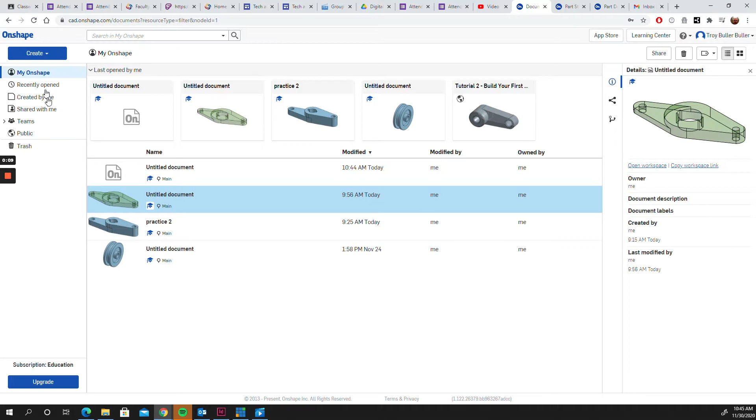Okay, we're in Onshape here, and I want you to go ahead and create a document. You just click Create Document. I've already got one started, so I'm going to open it up.

What I want you to do is go sketch on the top plane. I want you to sketch this.

So all I used was circles and rectangles. Let me get in that sketch. I want to add one thing to it. So I just use circles and rectangles, and then go ahead and pause the video here and get that sketched out.

It doesn't have to be the exact same dimensions as mine. Just get something very similar sketched out, and then we'll come back and extrude this.

Extrusion is where you make something 3D. So that's what we're going to be doing today.

Okay, I'm going to go ahead and extrude this. So you need to make sure you don't have any tool highlighted. So like here I'm on circle, right? How you get out of that tool, if it's turned blue, you just click on it so none of these are blue.

Okay, we're going to extrude this circle first.

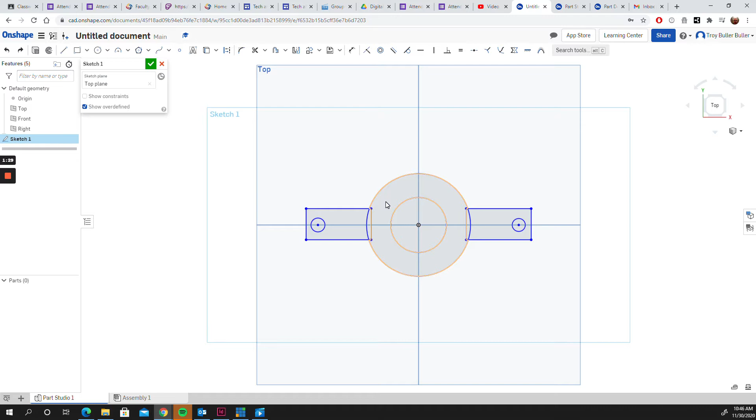Anything you don't select that's inside of it is going to extrude as a whole. So I'm going to select this face. Now notice I didn't get these outside, so when you have overlapping stuff and you want it, you have to go select it as well.

So you just kind of keep clicking. May have to zoom in here. Keep clicking until you get everything.

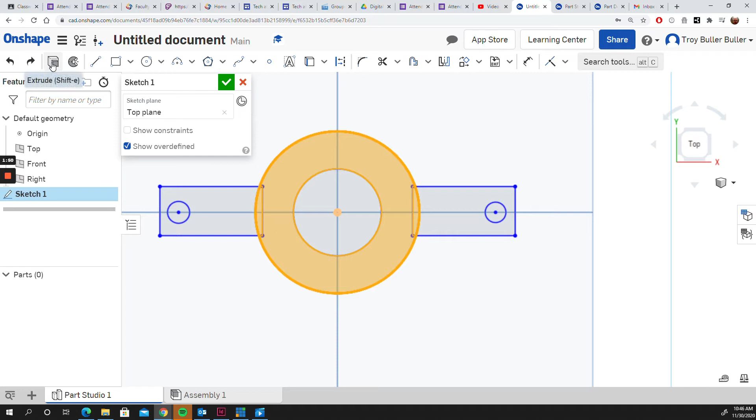And then we're going to click this button, and it's going to bring up our extrusion menu. I'm going to scroll to the side here. A couple things - there's different types of extrusions you can do. We're going to use blind right now, but we'll talk about some of these others later on.

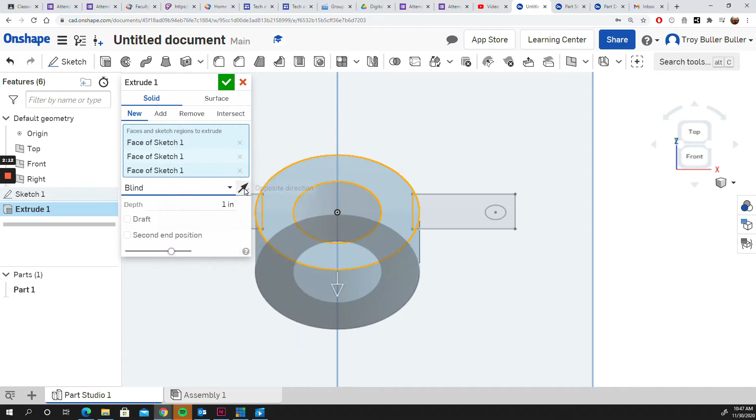You can also flip it. So if you want it going downwards rather than upwards, you can click that arrow and it'll go up or down. And then kind of the last thing is you can set your depth.

So I want this to be 3/4 of an inch. So I'm going to hit OK.

And so that'll set your depth, but you can also, if you're just wanting to eyeball something, pull it with this arrow right here. So I'm going to go back and set it at 3/4 of an inch.

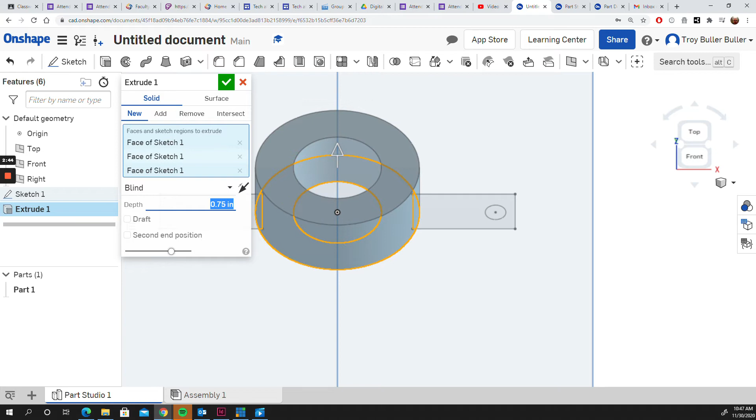Okay, so once I kind of get that extruded where I want it, I'm going to click that. Now notice my other pieces disappeared. That's okay because we're going to extrude those too.

We're just going to click on Sketch again and go up to the top, and I want this one and this one both to extrude. So I'm going to extrude those, and we'll do those to, say, 0.33 inches.

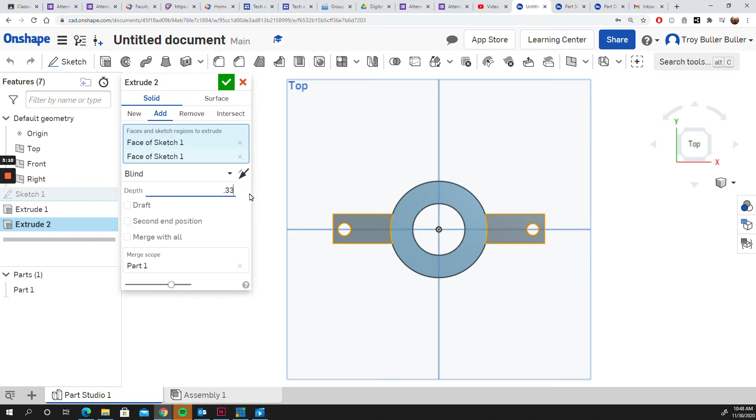And let me rotate this around so you can see what's going on here. Okay, so we have a piece now. And notice I got a part in my parts inventory. So we're going to talk about that.

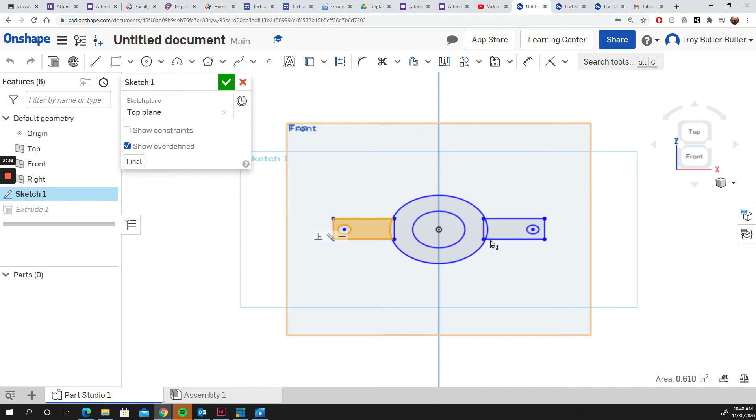The other thing, some of you had questions. Oh, I just accidentally deleted that. Get these to extrude. And this time I'll click the check mark.

Okay, I don't know what this is. We're going to rename this part because later on we're going to have parts inventories where we can assemble stuff into working models.

So I'll just call this Acme. I don't care, it can be anything. So you do that by right-clicking and you rename.

Now I want to go ahead and assign a material because I'm going to teach you about the mass.

So I'm going to assign a material. Click here, and we'll click Onshape. I'm sorry, we're going to click there, and there'll be a whole bunch of stuff in here. If you need to search something, you can just type it. So I want 300 stainless steel, and I'll go ahead and click the check mark on that.

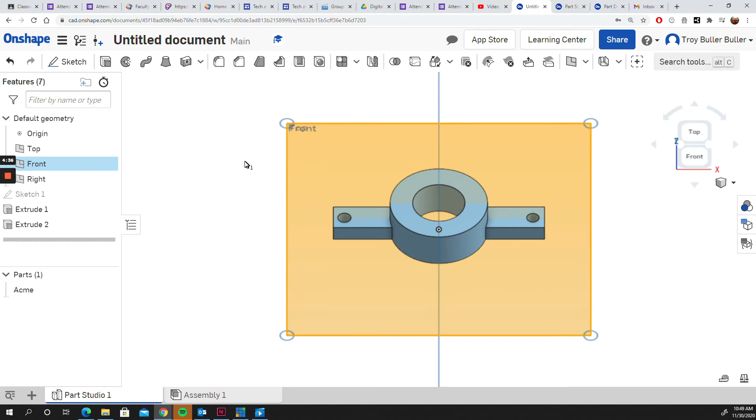So I assigned it a material. Oh, I didn't have it selected. Let me get everything selected. Oh, I missed part of it. Okay, everything's selected. Now I'll right click on it, assign material, and oh, it's 300 stainless steel.

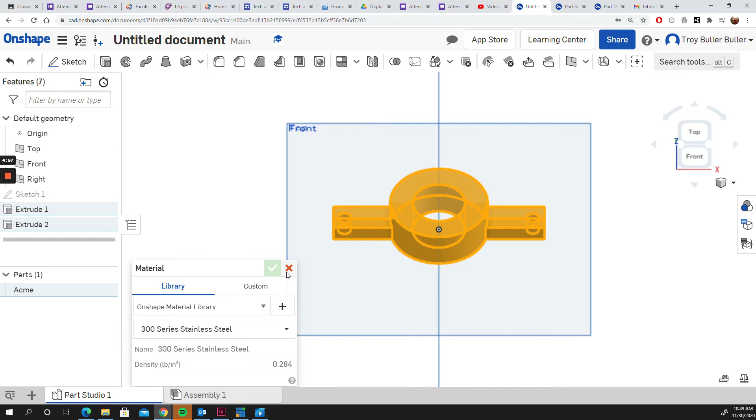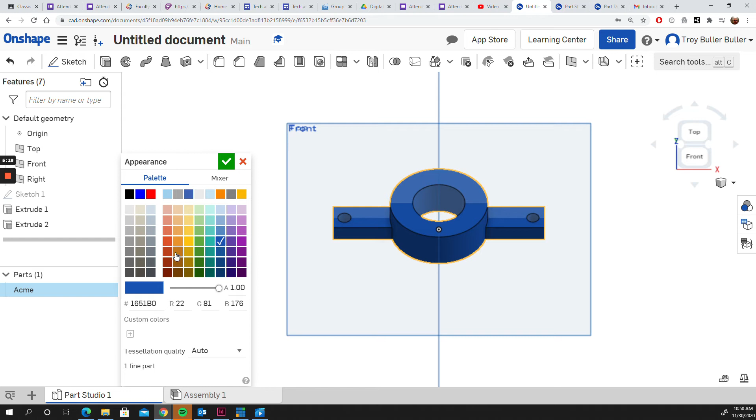We'll just make sure though. Okay, you can also change the appearance of it. So you can right click on it and edit appearances, and you can pick colors. You can also right here change the transparency, so if you have something that has glass in it, you can change it to where it's a little bit see-through. Those are some of the properties. You can also go to Mixer and create a color, and that should show up in your palettes after that once you use that. So we'll click check mark.

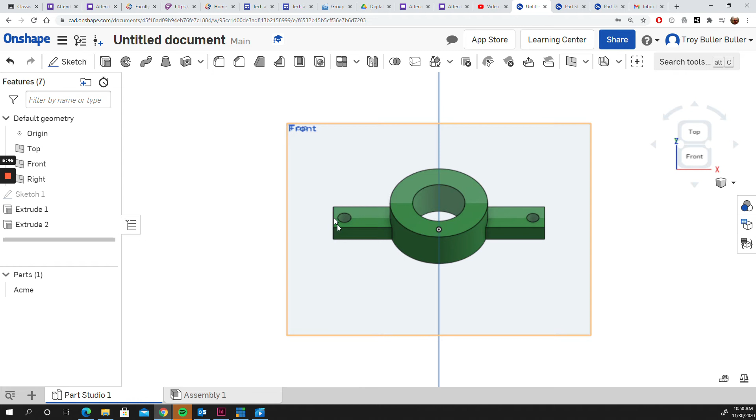Okay, so I've got my part here. How do I find out what the mass is? I can just go over here and display properties. I've got to have it selected, so I'm going to pull out a selection box. And you can tell here that I have a mass of 0.558 pounds, volume of 1.6966 inches cubed, and what the surface area is. So this will give you all those things. I'm going to go ahead and shut that down.

I know some of you had problems with getting into other units, so I want to show you how to do that. Whoop, bumped off my tab. There we go. So what you'll do is you'll go right here and workspace units, and you can change this to feet, inches, centimeters, millimeters, whatever you're working in.

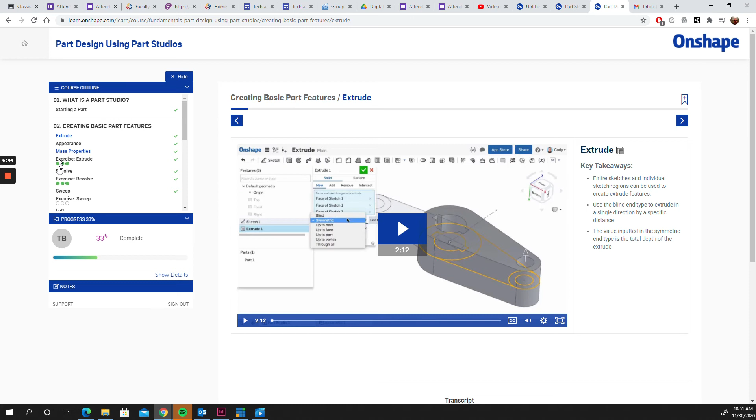So after you've watched this video, what I want you to do is click the link I have in Google Classroom, and you're going to come down here to exercise extrude, and you'll click the over arrow, and notice there's a whole bunch of things here. You're going to set those parts up in size, and if you ever need to change the size of a part, it's not a big deal.

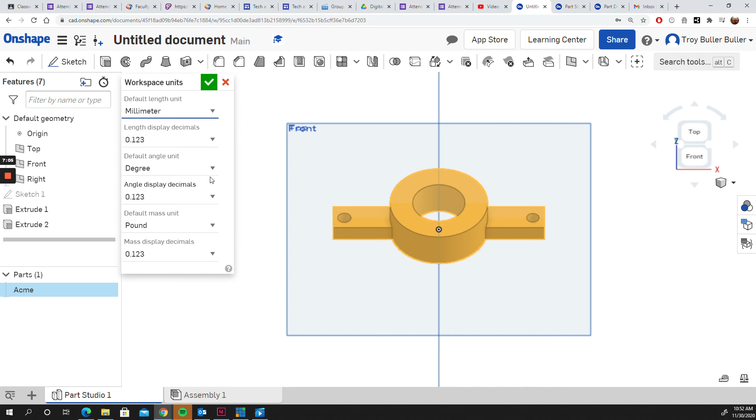I just sketch it out and then start changing the sizes. Let's go to my sketch, and let's click on that, and click the measurement thing. Oh, that's not what I wanted. Just a second. I always forget where the measurements are. There we go. Oh, I'm struggling here. Just a second.

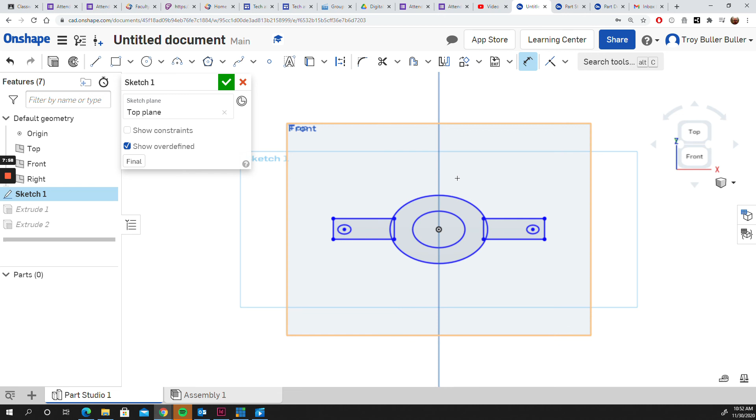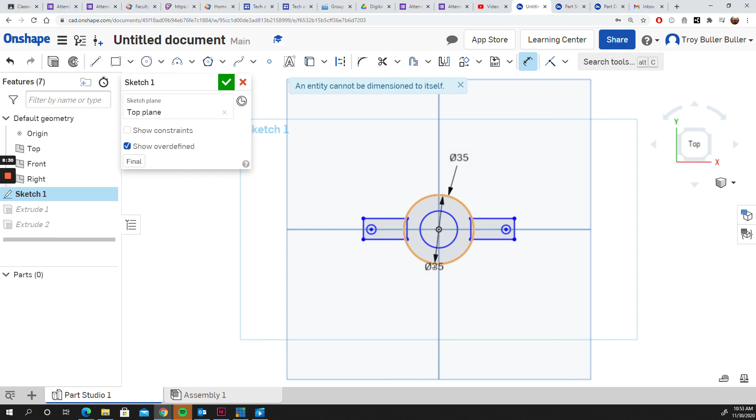Okay, you can retype that. So if I wanted it 50 instead of 48, you could type that. Let's do something quite a bit smaller, let's do maybe 35. You will want to do those things before you extrude, but you can see here now I got a measurement of 35 on the diameter. It did shrink everything else. If you do this before you extrude, it shouldn't shrink everything else. I would probably go ahead and type them in, and that should get you there.